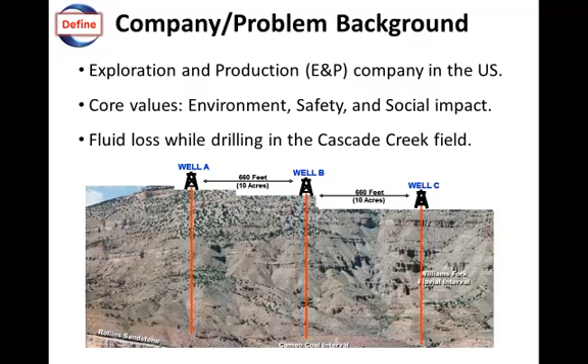The problem that is being addressed by this project is the loss of drilling fluid used to drill wells in the Cascade Creek field in Colorado. The picture depicts the location of the wells that are being drilled. The general drilling process that is used in the Cascade Creek field is described according to the following steps.

First, the conductor casing is set at a depth of approximately 100 feet. Then the drilling process continues and the surface casing is also cased and cemented until the depth of approximately 2,700 feet. The surface casing is pressured at 1,500 psi for 30 minutes to test the capacity of the casing to isolate the wellbore from the rock.

Continuing the drilling process, in step 4, the production casing is reached at a depth of 9,000 feet. The casing is equally set and cemented. Step 5 in the process is the testing for the production casing, which is done at a pressure of 2,500 psi during 30 minutes. The last step indicates the drilling process is ended.

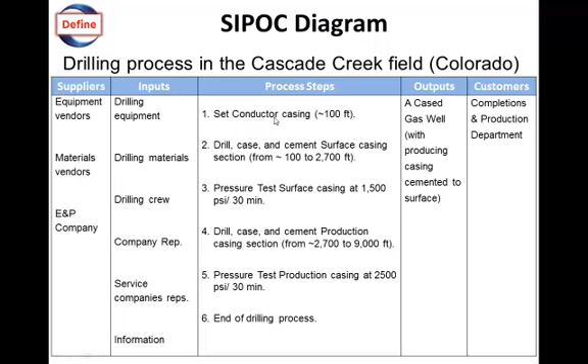The inputs required for the process include drilling equipment, drilling materials, drilling crew, a company representative, service company representative, and the drilling information. The suppliers are equipment vendors, material vendors, and the exploration and production company. The output of the process is a cased gas well that includes a production casing cemented to surface, ready for the completions and production department, which is the customer.

During the drilling process, the drilling mud is used to lift the rock cuttings to surface and to provide well control. The measurement system flowchart shows how the mud is measured to provide information about fluid loss and fluid influx from the formation to the wellbore. The measurement system is done in 2 main phases by the mud engineer, who reads the heights in the mud pit from the mud level rule.

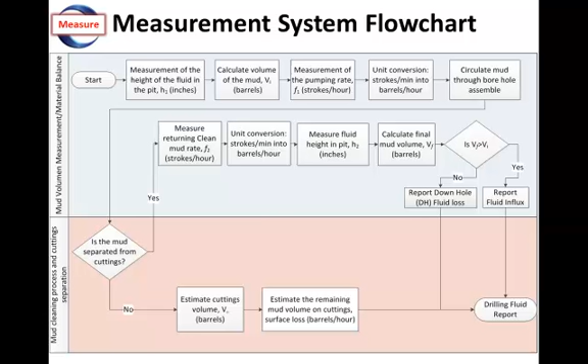The engineer calculates volumes and takes the pumping rate in strokes per minute from the electronic display on the mud pump and converts units to barrels per hour. The measurements in this phase are done before drilling and when the mud is returned to surface. The other phase involves the fluid loss estimation that is related to the fluid adhered to the cuttings. The measurement system flowchart ends with the drilling fluid report, which contains data of fluid influx and fluid loss.

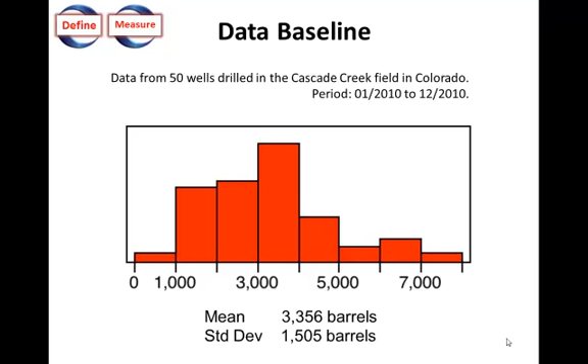This histogram shows the fluid loss data collected from the 50 wells drilled in the Cascade Creek field in Colorado from January to December 2010. The histogram indicates that the average fluid loss was about 3,400 barrels with a standard deviation of about 1,500 barrels. The team made the problem and the mission statement as follows.

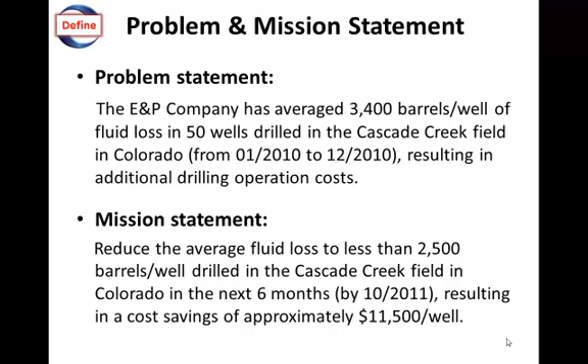The problem statement is: the E&P company has an average of 3,400 barrels per well of fluid loss in 50 wells drilled in the Cascade Creek field in Colorado from January 2010 to December 2010, resulting in additional drilling operation costs. The mission statement: reduce the average fluid loss to less than 2,500 barrels per well drilled in the Cascade Creek field in Colorado in the next 6 months by October 2011, resulting in a cost saving of approximately 11,500 per well. The team created a cause and effect diagram in terms of statements to identify the causes.

The team used the cause and effect diagram to identify the potential causes of the fluid loss problem. In a meeting with the personnel from the exploration and production company who are directly involved in the drilling operation, it was concluded that there are 6 major cause categories. The meeting included supervisors, engineers, and field operators who have participated in the drilling campaign in the Cascade field between January to December 2010. A brainstorming exercise with the drilling personnel allowed us to identify about 60 potential causes and subcauses.

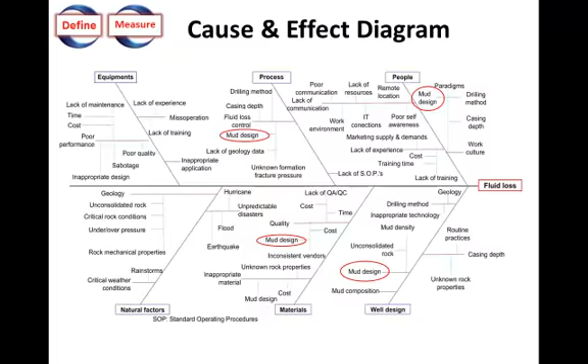In order to identify the critical causes from the potential causes, the team listed all the potential causes and looked for the causes that appear repeatedly across the major categories. The data was gathered using a check sheet to determine the relative frequency of the different causes. The data showed that the top 3 potential causes with the highest number of occurrences are mud design, the casing depth, and the drilling method.

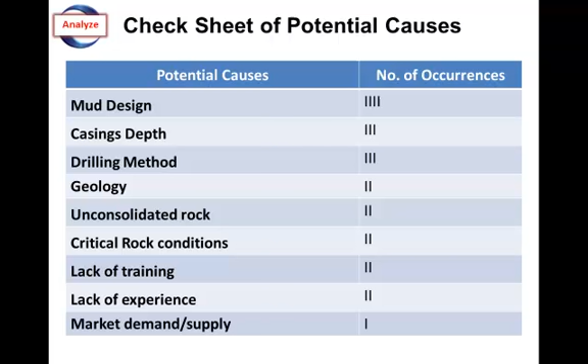The results of the analysis were discussed with the drilling personnel to confirm that the found causes had a physical and practical relationship with the fluid loss problem. The engineers confirmed the physical relationship of the mud properties, the casing depth, and the drilling method with the fluid loss of mud into the rock. The team is going to focus on the drilling mud design, which has the highest occurrence among all the potential causes. The next step is the improvement phase.

The team used a prioritization matrix tool, also called option criteria matrix, to improve the mud design. Adding components to the mud like air, nitrogen, and other chemicals are the proposed solutions to reduce the fluid loss due to mud design. Each proposed solution was evaluated considering the desired characteristics such as safety, low density, easy handling, cost effectiveness, environmental friendliness, availability, and low reactivity.

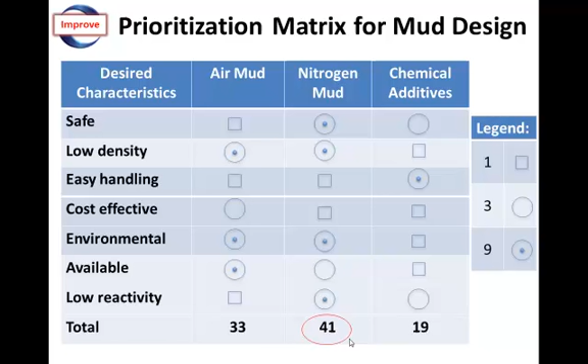Through this analysis, the team found that adding nitrogen to the mud had a maximum score of 41. Therefore, the team concluded that adding nitrogen is the best solution to reduce the fluid loss. Till now, the team has covered the define phase, measure phase, analysis phase, and improve phase. Looking forward to going more in depth into this project in the near future.